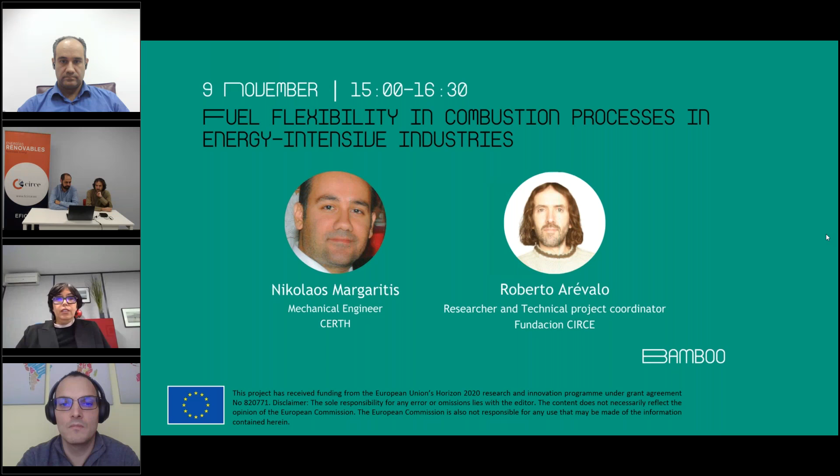I think Jorge is going to talk first. Thank you, thank you Selena for the introduction. So here we are, first of all I would like to say thank you to all the people that already joined the webinar.

This is the second of the series of webinars that we are using to learn about the different technologies that we are investigating during the Bamboo project.

So, can you pass to them?

Bamboo is the acronym for Boosting New Approach for Flexibility and Management by Optimization of Gas and Waste Use. This project, as Selena said, is financed by the European Commission under the call for H2020, and is part of the SPIRE program.

It's an innovation action funded with almost 11 million euros from the EU, and the duration of the project is 54 months, so we will end the project by February 2023.

Circe performs the role of coordinator, and we have 19 partners that include some research centers and some private industries that work mostly in the demos that we are performing at different sites.

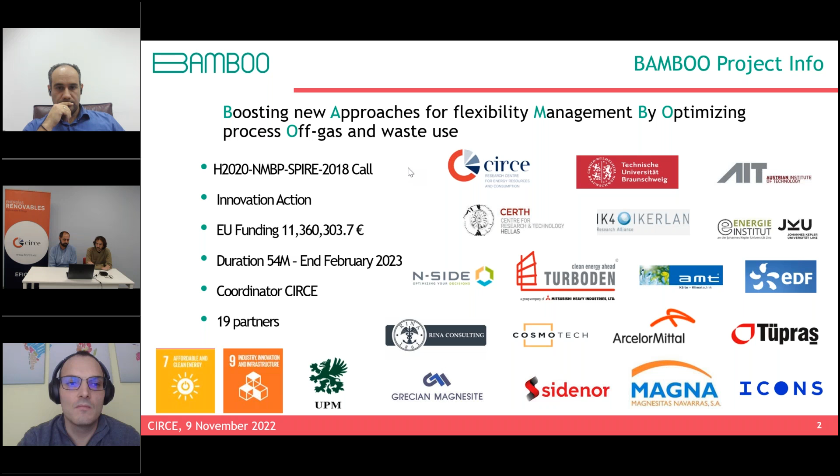So Jorge, if you want to go into more technical detail. Okay, good afternoon everybody, thank you for connecting today. I am Jorge Arroyo, I'm going to explain the technical part of the Bamboo project.

As you know, the energy transition towards a secure, competitive, and decarbonized energy system is a challenge for the intensive industries of the European Union. In this context, Bamboo is developing new technologies which will help reduce energy costs between 15 to 20%, reduce greenhouse gas emissions up to 23%, and improve energy efficiency 17 to 20%.

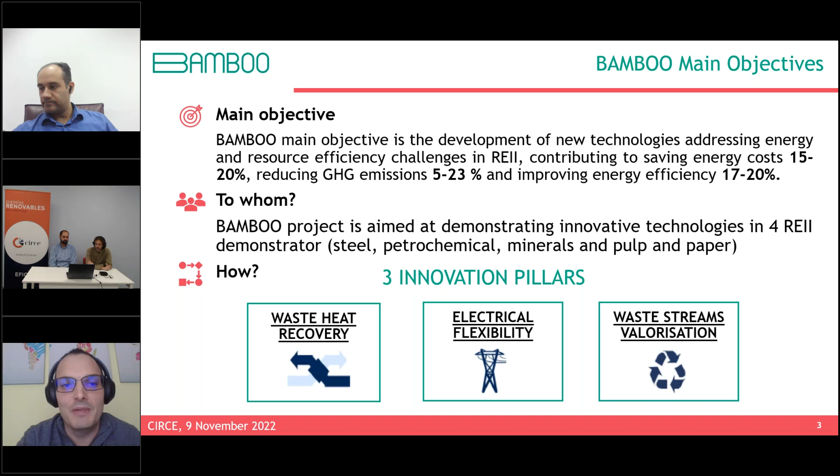Bamboo project is aimed at demonstrating innovative technologies that can contribute to European industry decarbonization, including the three main pillars of the project: waste heat recovery, electrical flexibility, and waste stream valorization. We are working on the demonstration of these technologies at an industrial level in the steel, petrochemical, paper, and mineral sectors.

In Bamboo, we demonstrate technologies for waste heat recovery. This is to valorize the energy content of some waste streams due to their temperature and their usage in other parts of the process. The project aims at demonstrating two technologies: high temperature heat pumps and organic Rankine cycles.

In the case of high temperature heat pumps, they are active heat recovery systems that allow the upgrading of low or medium waste heat to higher temperatures. We are working on a particular application for the case of ArcelorMittal in the steel sector to produce steam which can be used in parts of the process.

This application is expected to have a direct impact on the fossil fuel consumption of the plants. Part of the fuel used to generate this steam will be replaced by the energy generated by the heat pump. The second technology contributes to the electricity consumption reduction of the Tüpraş refinery from the petrochemical sector.

In this case, the organic Rankine cycle technology is studied to recover medium-grade waste heat generated in a crude distillation unit. With the ORC, this energy is converted to electricity which can be used directly in the plant, reducing consumption from the grid.

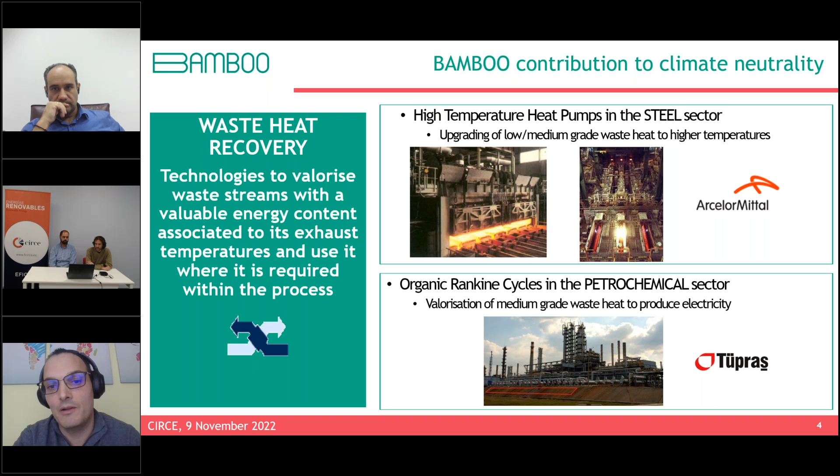The second pillar, which is electrical flexibility, includes technologies and operational strategies that will make it possible for industries to take advantage of lower electricity prices, providing grid services, as well as enabling the potential integration of renewable energies.

In this context, Bamboo is working on applying the concept of electrical flexibility to the pulp and paper sector, where different strategies and technologies are being implemented to allow the operation of a paper plant as a battery in a regional power grid. This means that during summer, where a high share of photovoltaic generation is expected, the plant will reduce or shut down its own generation system to consume more power from the grid.

While in winter mode, with very low renewable generation, the UPM plant generators can be used not only for internal use, but also to supply energy to the local power grid.

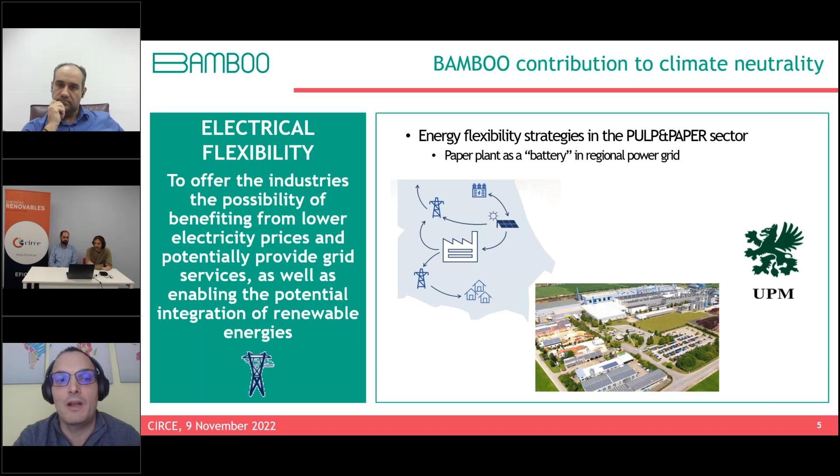The third pillar is waste stream valorization, which includes technologies and processes that allow the upgrading of different waste streams with valuable calorific value, generated inside or outside the plant, that can be used as fuels in other processes. This is the main topic for today's webinar, and Bamboo aims at demonstrating different technologies for the steel and mineral sectors. The concept for the steel sector is to increase the valorization of off-process gas as fuel, to increase the efficiency of the plant and reduce the consumption of fossil fuels.

In this sense, in Bamboo we are applying two technologies that contribute to the valorization of this process gas. On one hand, CFD simulation that allows us to analyze the behavior of combustion when these often low calorific value gases are burned, and a novel flame monitoring system which allows monitoring of the combustion to improve efficiency and decrease pollutant emissions.

For the mineral sector, the replacement of coke by biomass is demonstrated, with a direct impact on fossil fuel consumption, helping the decarbonization of the sector. Again, we are using CFD simulations to demonstrate how this biomass can contribute to the reduction of fossil fuel consumption and pollutant emissions. We have also developed low NOx burners, which can increase the share of renewable energy, contributing to decreasing the consumption of fossil fuel.

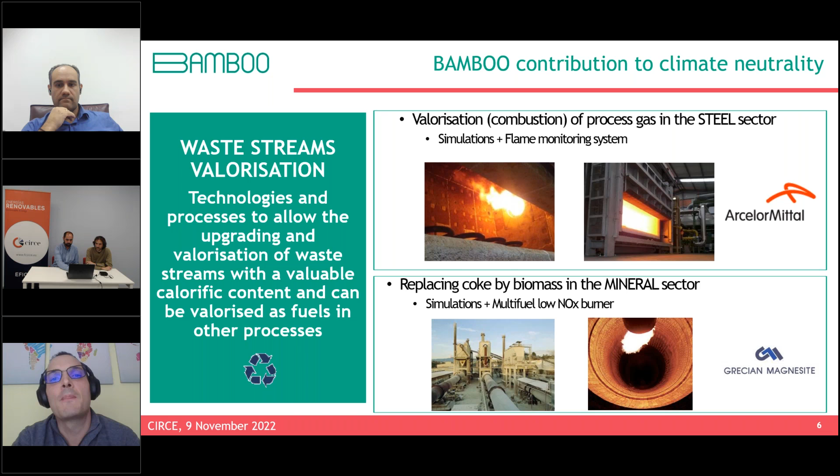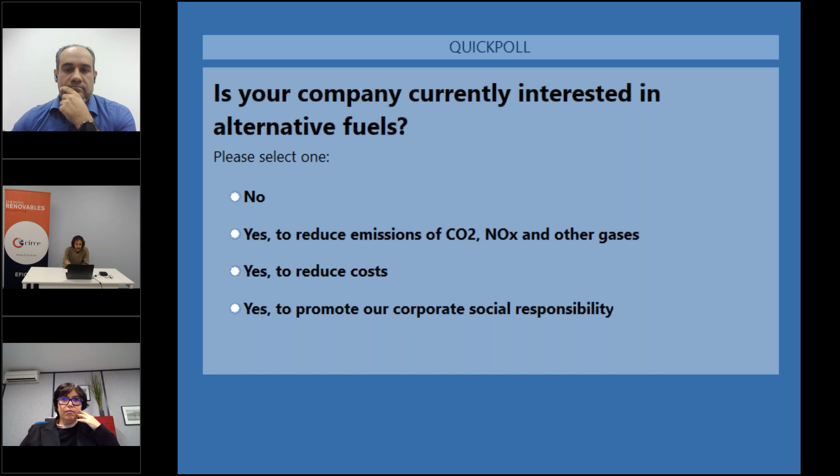Okay, so a small percentage, just 4%, is not currently interested in alternative fuels. The highest majority of you are interested in order to reduce emissions. That's very interesting, and there are a few who are more interested in reducing costs and promoting CSR.

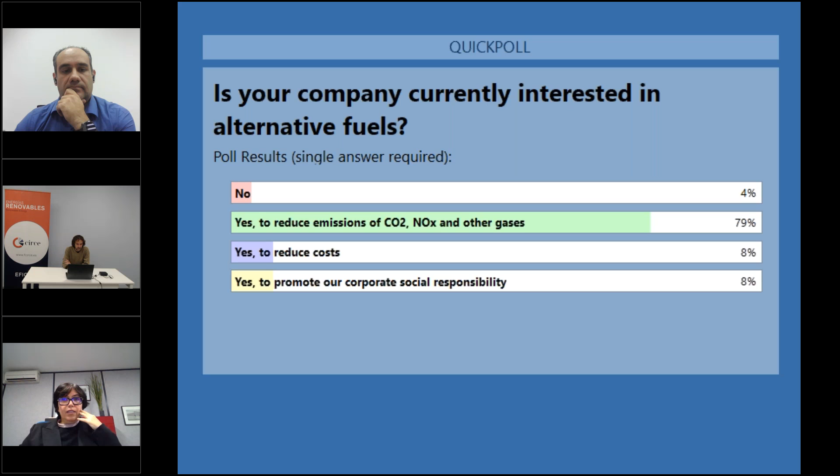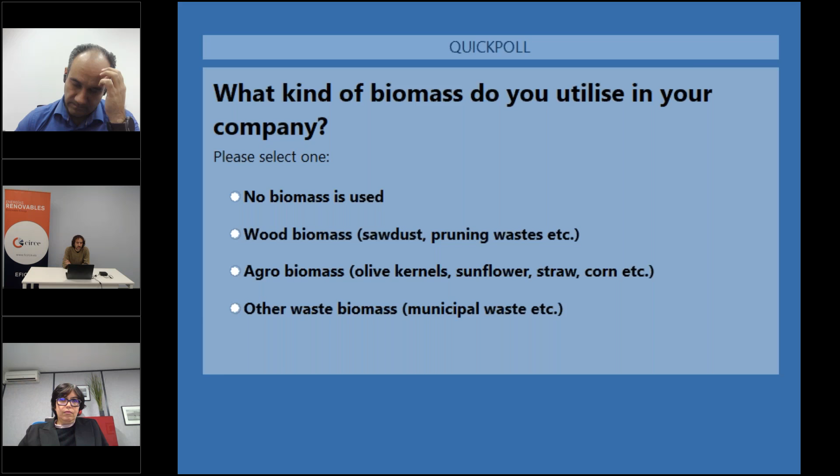Second poll: what kind of biomass do you utilize in your company? You might not be using biomass at all, wood biomass, agro biomass, or other waste biomass. Let us know. Okay, most of you don't use biomass, 39%. 30% use wood biomass, and the rest use agro biomass or other waste biomass.

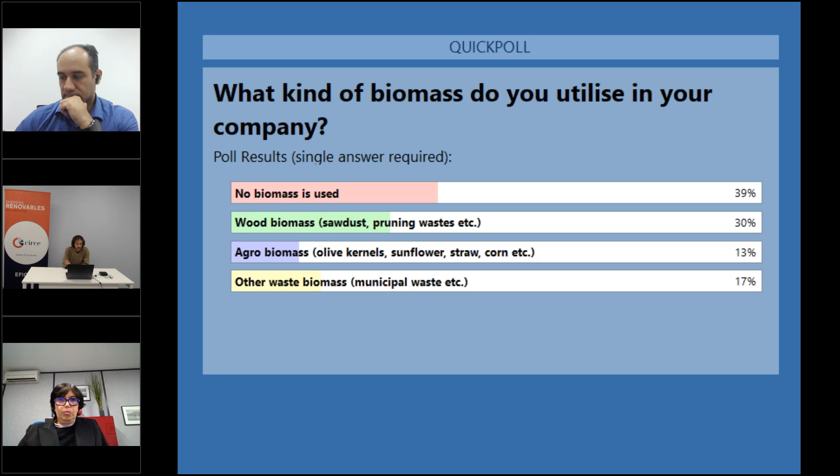Last poll, and this one is a bit tricky. According to you, do low NOx burners reduce the production of NOx by controlling fuel and air mix, reduce emissions by 100%, present high efficiency at very high temperatures, or are they similar to conventional burners but more expensive? What do you think? There is a right answer to this.

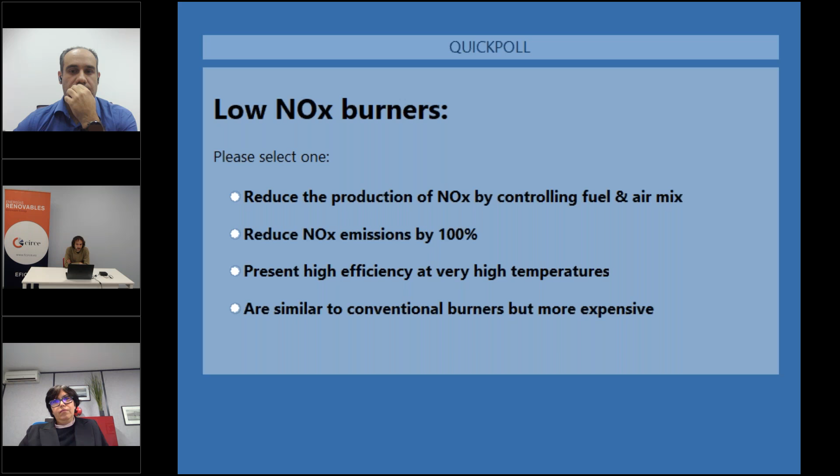So most of you selected the first answer, 14% the third one, and then the other ones received fewer votes. I don't know if the panelists want to give the right answer now, or do we wait for the panel to reveal it? What do you think?

I think the panel gave the right answer, by the 75%. The first answer is the right one. Low NOx burners reduce the production of NOx by controlling fuel and air mix.

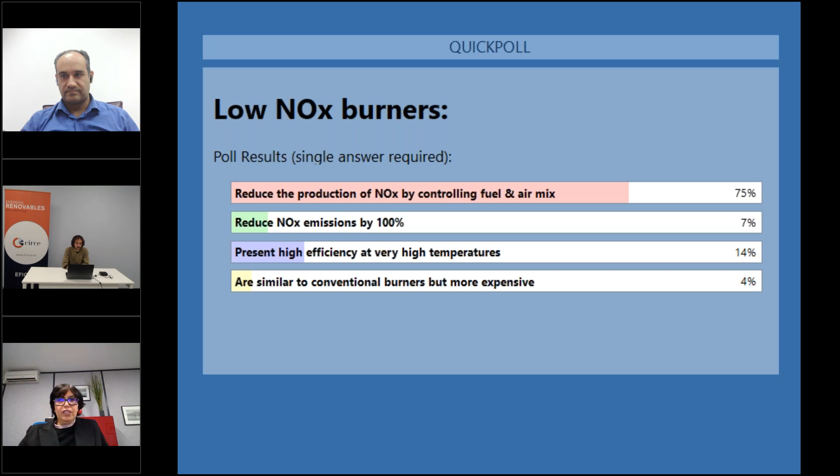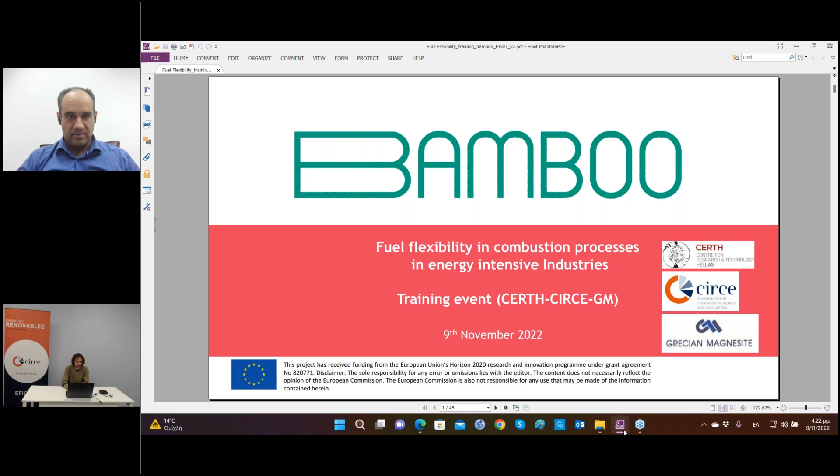Thank you, Selene, for the introduction and the comments in the poll section. Just a brief comment about the poll: I think most of the companies here are interested in reducing CO2, NOx, and other pollutants. This is a primary scope, but we can also say that this reduction of gases is related very closely to the cost of production of the company.

Biomass is not used by most of the companies here, but there is interest - 30% use wood biomass. It's the most commonly used biomass. 13% said that agrobiomass is used, and that's normal because agrobiomass has some difficulties when trying to apply it in the production process.

Regarding the low NOx burner, I think the audience chose the right answer. This is also normal because most of you are technicians here in today's webinar. So, I'm Nikos Margaritis.

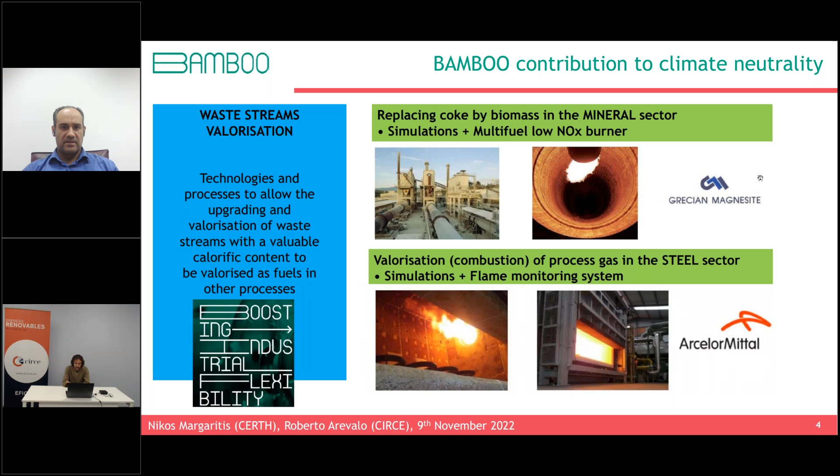Regarding energy-intensive industries, what are the challenges? When we say energy-intensive industries, we usually refer to cement, lime, magnesia, sintered lime, ceramics, glass, steel, and other similar industries. Usually in these industries we have high temperature processes, up to 1,100, up to 1,800 or higher, and of course we have CO2 emissions that derive either from the combustion of fuels or from the decomposition of carbonate raw materials, which is an inevitable process we can do nothing to avoid.

Also the use of carbon as a reducing agent, and fuel combustion, as known, entails high thermal losses and may also lead to other pollutants like SOx, NOx, CO, and other pollutants.

We're talking usually about continuous production cycles that require steady energy supply. This is very important and also a challenge for these industries. Energy efficiency and productivity can be increased by thermal insulation, energy recovery to use the heat, heat pumps, organic Rankine cycles, or automation and digitization, which can also contribute to energy efficiency and productivity.

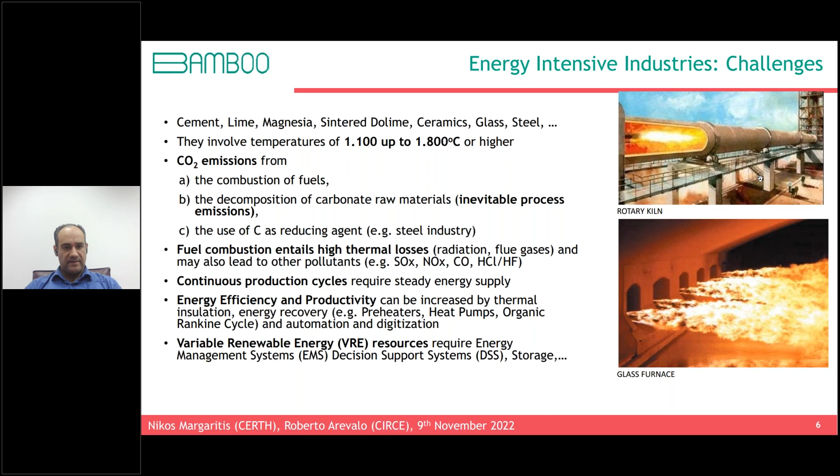And also use of variable renewable sources, a good energy management system, and a DSS tool - all these things can help increase the energy efficiency of energy-intensive industries.

Regarding decarbonization, the top priority of EU member states is to gradually move to a low carbon economy, meaning 80% reduction in emissions by 2050 compared to 1990 levels. CO2 emissions in the case of the magnesia industry derive from fossil solid fuels related to their production process. This type of emission must be tackled so these industries do not face issues due to continuous increases in CO2 prices. They have some CO2 free allowances until 2030 according to EU regulation 2019, but after 2030 they're going to face increased CO2 prices, so the problem of cost reduction will always be important.

So here we can see that the CO2 price in March 2021 was below 40 euros per ton, and we see that gradually it increases. It reaches in January, February 2022 almost 90 euros per ton, and now, on the 4th of November, it was below 80 euros per ton.

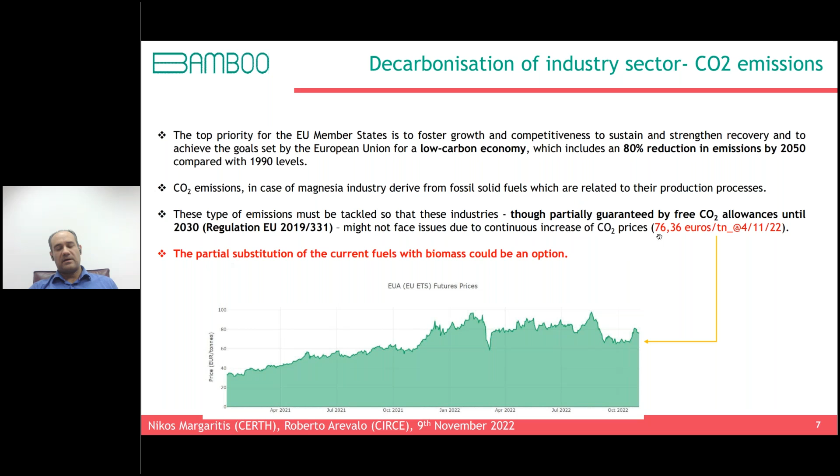One of the drivers for biomass and coal co-firing is the increased environmental performance at a modest cost. What we earn when we replace biomass during co-firing is a reduction of SOx emissions. Also, biomass helps to reduce mainly NOx emissions, and biomass can also reduce flame temperatures, which leads to lower levels of thermal NOx. Also a reduction can be the case if high moisture biomass is used.

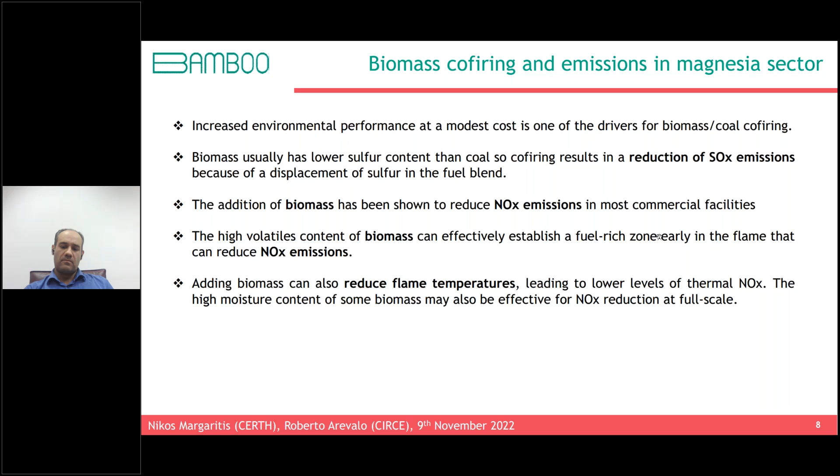Regarding the use case of Grecian Magnesite in the Bamboo project, we had to support the Greek demo, located in Chalkidiki, north part of Greece. Here we see the calcination plant in Yerakini mine, the installation, the premises of the company. Here you can see the rotary kilns of the company, where they produce natural magnesia from magnesite.

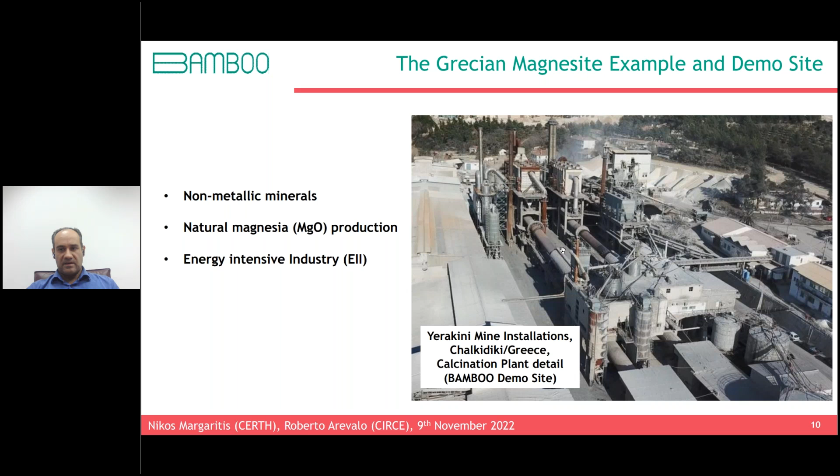Regarding the production flow sheet, first of all they do mining, extraction of raw material. Then there is a stage of pre-beneficiation, separation of magnesite from the waste rock. Then there is beneficiation, the qualitative separation of magnesite grades. Then we have calcination in the rotary kilns I showed you before. What does calcination mean? Magnesite is transformed into magnesia. The product for GM, the final product, is magnesia.

Magnesia can be calcined magnesia, which is produced at temperatures between 900 and 1100 degrees in the kiln, or another product is dead-burned magnesia, called DBM. We have CCM, the calcined magnesia, and the DBM product, which is more challenging in its production because it's produced at temperatures well above 1800 Celsius.

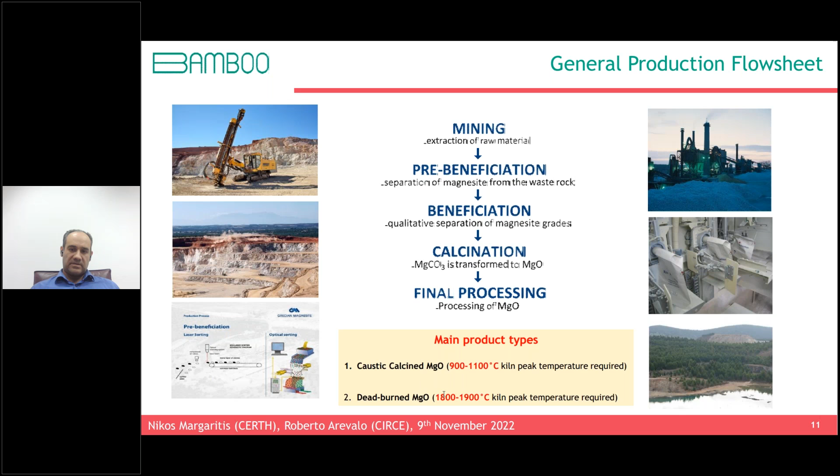So what are GM's targets and challenges? GM has had some targets, and this was the reason to participate in the Bamboo project. The main target was to increase the energy efficiency of the calcination department and globally at the Yerakini plant, to reduce the dependence on fossil fuel - their main fuel is coke, pet coke - and so they want to gradually replace coke with biomass in order to reduce CO2 and NOx emissions, to allow flexible energy consumption according to market prices, and also to check some good practices regarding waste heat recovery in their process.

For example, ORC or heat pump application, or any other technology studied in the Bamboo project. What are the challenges for GM? The main limitation resides in the high temperature required to produce DBM. As I said before, DBM is a challenging product to produce because you need very, very high temperatures, and these temperatures cannot be accomplished without conventional fuel, pet coke, in the fuel mix, but you need a high fuel specific consumption.

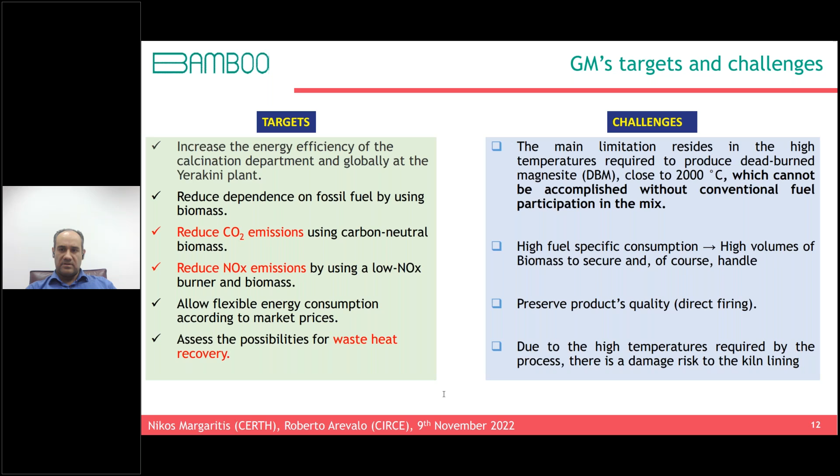What's biomass? The biodegradable fraction of products, waste, and residues from agriculture, forestry, and related industries, as well as the biodegradable fraction of industrial and municipal waste. Here, GM, in the framework of our project, wanted to utilize wood chips and sunflower husk - so wood biomass and agro biomass - in order to replace some pet coke.

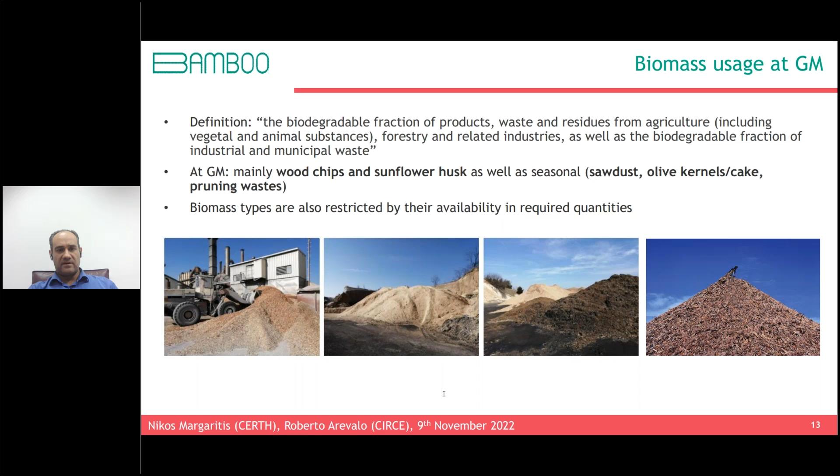The choice of biomass was restricted by availability in the near area of the demo site, because other biomass could have been used for the experimental campaign - for example, olive kernels - but in that specific time season, no quantities of this biomass were available in the market. So GM had to adapt and choose sunflower husk as the main fuel to substitute the pet coke at that time.

Here we can see the heating value of biomass related to pet coke. Pet coke is the main fuel of GM, with almost 8,000 kilocalories per kilo as its heating value. The other biomass fuels—olive kernel, sunflower husk, sawdust, wood chips—have almost half the heating value of pet coke. This means you have to double the quantity of biomass in order to produce the energy needed for the process.

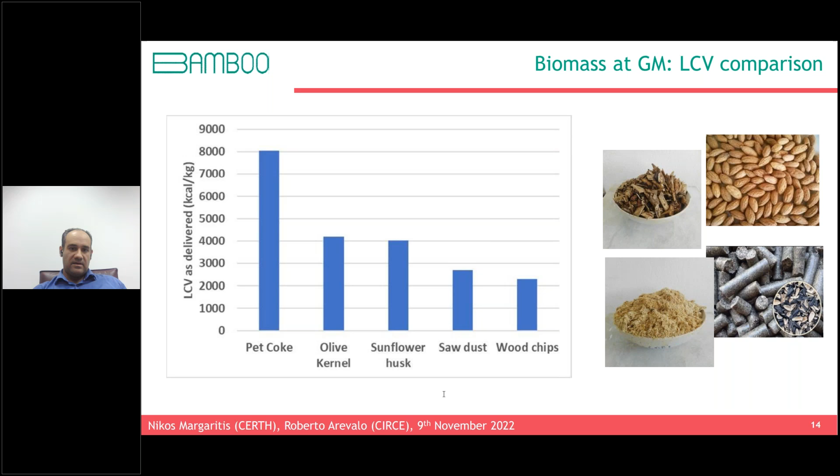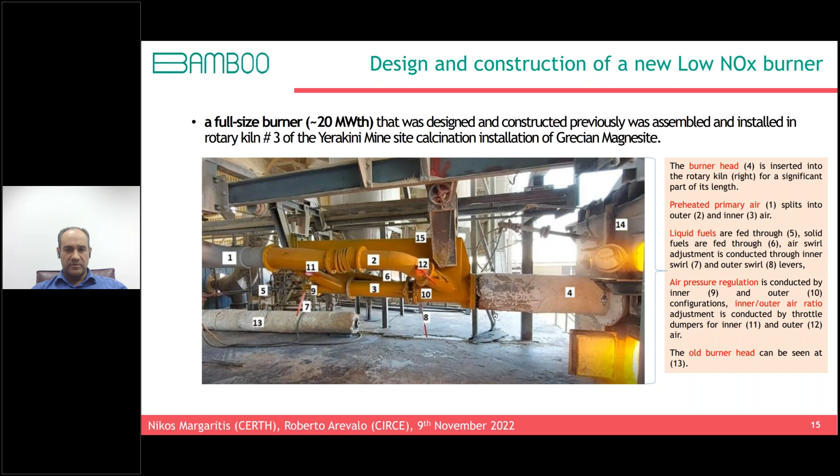So this was the Greek demo, the application of this low NOx burner, in order to check its efficiency in reduction of NOx emissions during the production of magnesia products.

So the initial burner test was successful, and the first trials were very good.

We have a question. What is the CO2 reduction in flue gas combustion using biomass instead of coke?

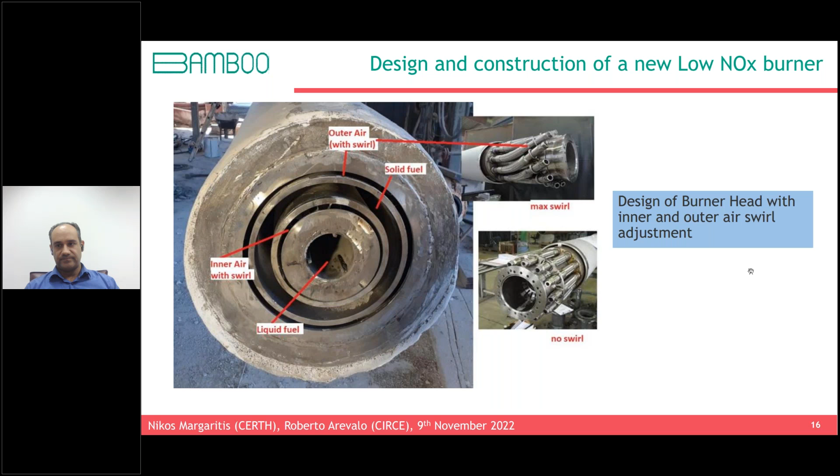Another question: can coke still be used in the new burner in case of no available biomass?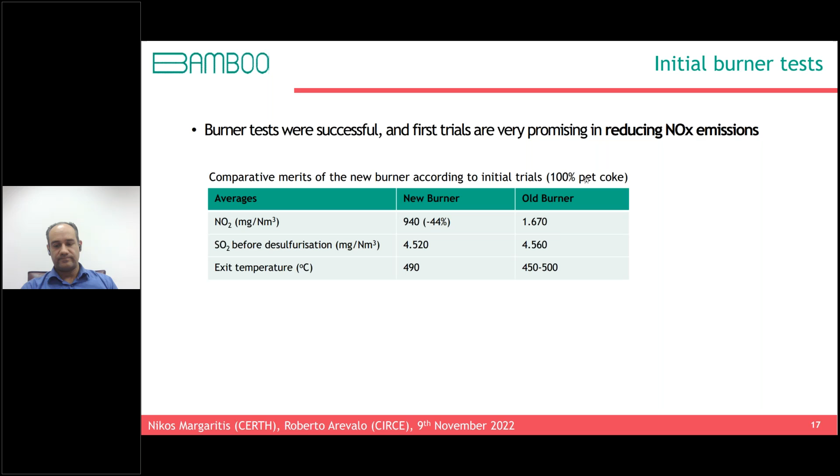Yes, of course, you can use it. You can use the LNB with 100% pet coke—these results refer to 100% pet coke. There's no problem. These burners are designed this way to handle also biomass except for pet coke, but pet coke is the easy way.

Here you can see the fuel mix preparation. Here we have the biomass, sunflower husk pellets, and the twin rotor in order to achieve the proper granularity of the biomass. In another silo we have the pet coke. Pet coke and biomass are entered into this feeding silo, where the mixed fuel is prepared.

Then we have a mixer here, a weighing system, and the mixed fuel. This is the image of the mixed fuel, pet coke and biomass—you can see the color of pet coke is more intense. So this fuel goes to the low NOx burner we mentioned before, at the entrance of rotary kiln 3.

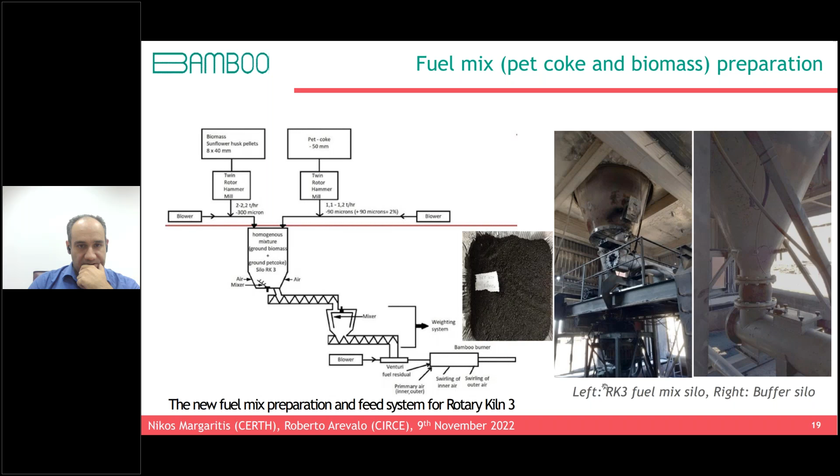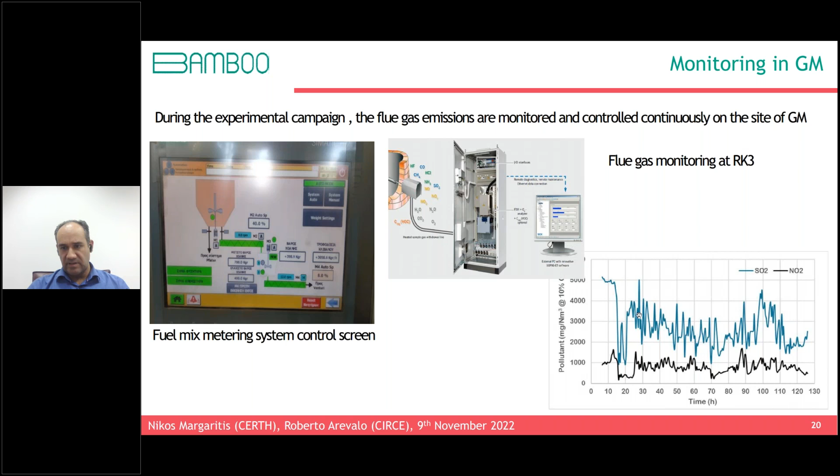During the experimental campaign, we had flue gas emissions monitoring in order to check the SO2 and NOx emissions, and also from this card you can see the control of the fuel mix, biomass and petcoke, anytime in the rotary kiln. Here we can see the SO2 and NO2.

This table summarizes the main results of the experimental campaigns conducted in February 2022 at GM with the support of us, the Research Institute. These concern various DBM grades and petcoke substitution rates of 50%, which was the maximum substitution rate achieved during these experimental campaigns.

You can see also the comparison with 3 cases. The first case was only petcoke - this is the business as usual case, only petcoke in the rotary kiln. You have this SO2, this NO2, and around 1,500 Celsius.

When we used sunflower husk pellets with petcoke, you can see we have petcoke at 1,000 kilos per hour flow rate, and we have also sunflower husk in the fuel mixture. We have a 50% contribution of petcoke energetically with biomass.

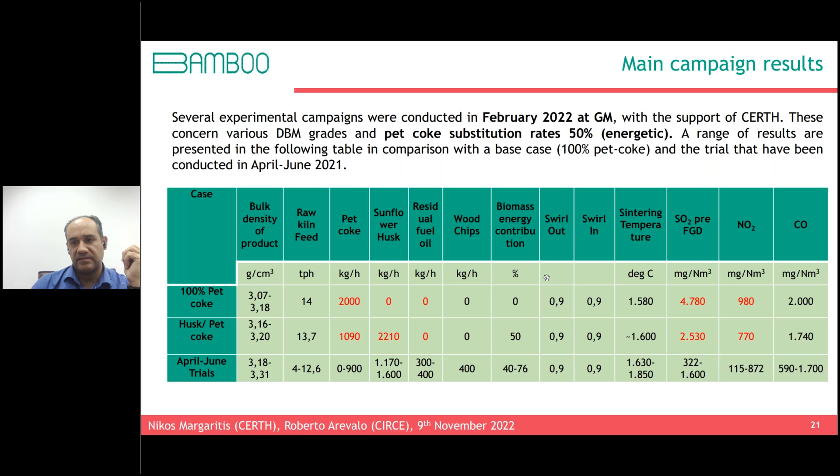We have in Ptolemaida in Greece a laboratory dedicated to chemical characterization of solid fuels. We have all the necessary equipment to analyze, according to ISO 17025, biomass fuels, solid fuels, SRF, municipal waste, and any other solid fuel that can be used in production can be physically and chemically characterized by us here in Ptolemaida in our lab.

So here we see the main results of petcoke analysis, sunflower husk analysis, and mixed fuel analysis in terms of moisture, ash, volatiles, carbon, hydrogen, nitrogen, sulfur, chlorine in the fuel, and also energy content of the fuel.

So we see here the high energy content of the petcoke, around 8,000, and half of this, around 5,000, is the heating value of sunflower. So the mixed fuel that we receive, with the mixture of these fuels, has a high heating value of around 6,700 calories per gram energy content.

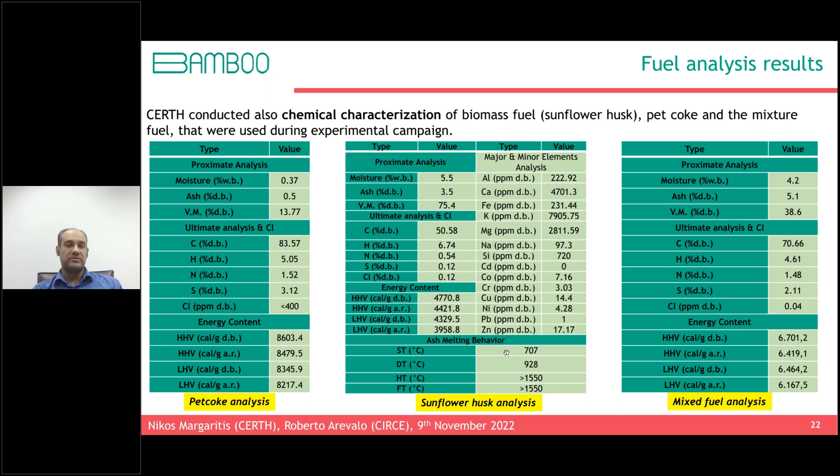SO2 emissions are reduced because, as you can see here, biomass usually has very low sulfur content, 0.12, in contrast to petcoke that has high sulfur content, almost 3.12%. So the final fuel has around 2% sulfur in the mixture, so it's smaller than 3. This smaller sulfur concentration in the final fuel means that you have reduced emissions in your flue gas in the end.

The planning of GM is to maximize the co-firing ratio to above 50%, taking into account the existing technical limitations and without compromising product quality, as I said in the beginning.

GM has 3 rotary kilns. This was applied in rotary kiln 3, so this can be replicated also to the other 2 rotary kilns of GM.

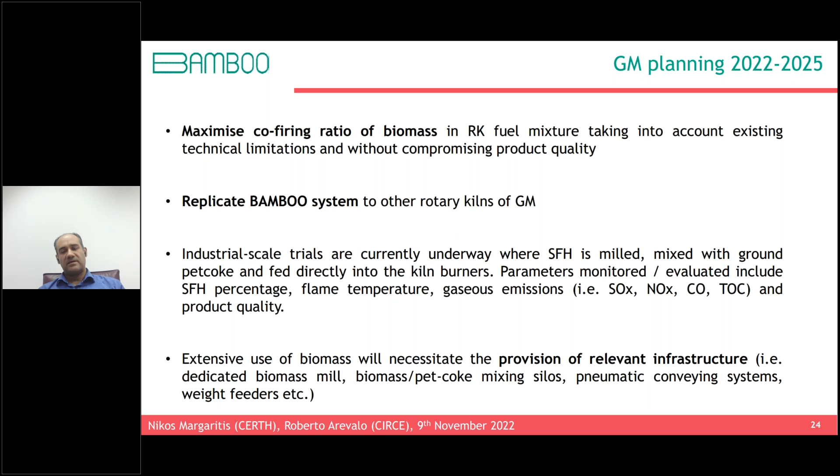But important is that the extensive use of biomass means that you have to invest in relevant infrastructure, dedicated biomass mills, biomass petcoke mixing silos, in order to handle the biomass petcoke mixture better. So an investment has to go there in order to handle the new fuel that you are going to use in your production process.

Now I give the floor to Roberto in order to analyze the use case of ArcelorMittal, and I will also tell some things in the end for the flexibility tools. Before giving the floor to Roberto, I have another question.

What is the humidity of biomass and how can it affect the heat consumption, since the water can absorb heat from the combustion? The biomass usually has high moisture, 4%. This means that you have to use more biomass in order to achieve the right energy you want to produce your DBM or CCM product. And the high moisture is good because you reduce the flame temperature, and when you reduce the flame temperature, you reduce the NOx emissions. So it's not bad to have this moisture in the biomass.

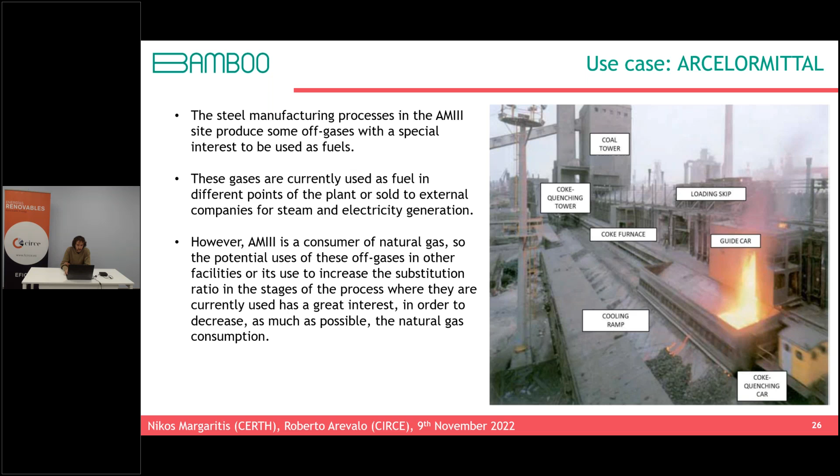Regarding fuel substitution or alternate fuels. ArcelorMittal hardly needs a presentation, worldwide steel producer. We've been working with a factory in the north of Spain, and here the focus is on using process gas as a fuel to substitute part of the natural gas that they use. The process gas we are interested in is BFG, blast furnace gas, which is produced in one of the early processes of the plant.

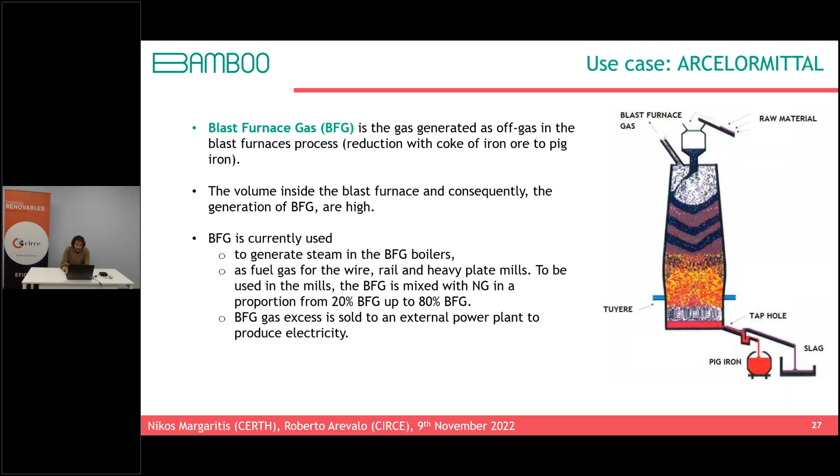This means that when we are using BFG to replace part of the natural gas, we have to use much higher flows. Although BFG is highly available in the plant and much of the piping is already in place, we have to be careful because these high flows can put stresses and other problems on the piping.

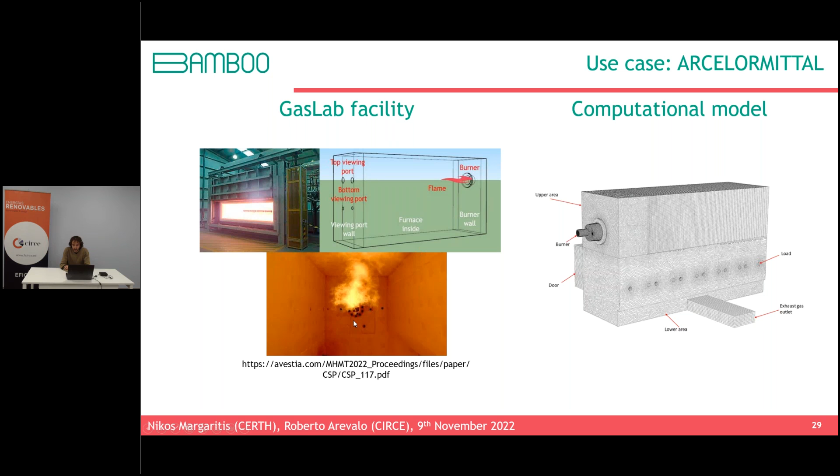The activities that we have done in Arcelor, together with Arcelor, is a twofold study. We carried out an experimental study in a gas laboratory facility, which is a small chamber with a burner. On the left you can see pipes that simulate the load of the burner. On the right part of the screen, you can see the computational model that we used to perform simulations of this facility and of the combustion of mixes of gases.

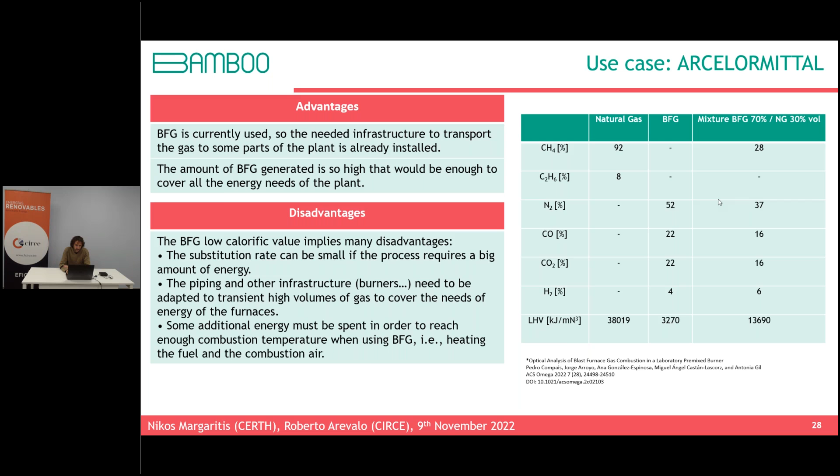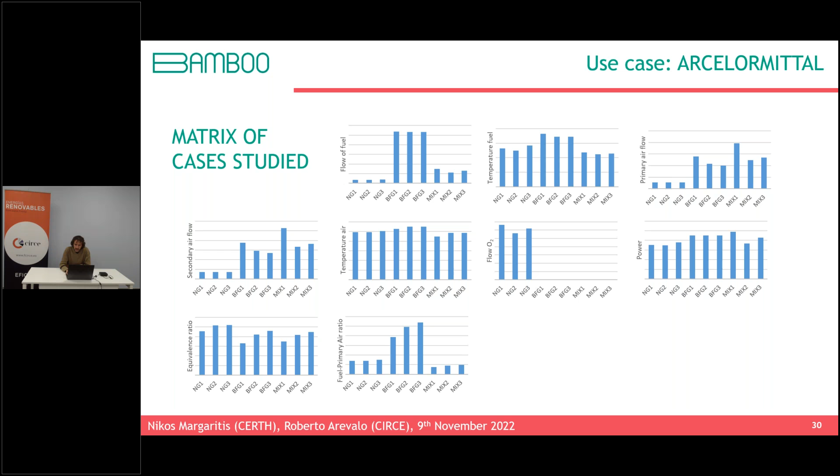There is a question: does the BFG need any treatment to be used as fuel? No, as far as I know, it is used without pretreatment. Yes, it is used as such.

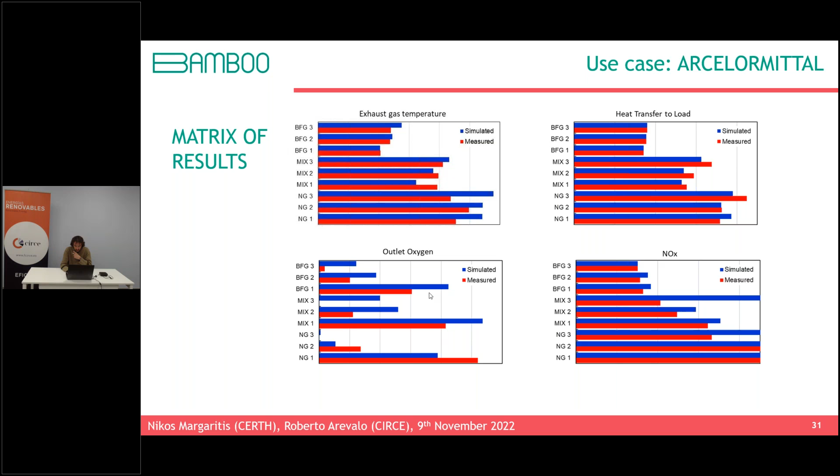So my part is shorter. I'll come right now to the conclusions. In general, comparing the experiments and simulations carried out with BFG, meaning only BFG as fuel, and the mix of BFG and natural gas, we can see that when we use only BFG, we need a much higher flow of gas because of the lower heating value.

This is pertaining to the question: BFG had to be preheated by 10 degrees Celsius, so it's not a huge preheating, just a small one. Regarding thermal load, heat transfer to the load, with BFG only 50% of the thermal load was achieved, but using a mix we reach 80%, and for the rest 20% can be tuned, of course. This could be done, for example, with simulation to come up with the right value of the mix that would give us 100% load.

The temperature of the gas in the chamber with BFG was 200 to 300 degrees lower. This is to be expected also. Instead, when we use a mix, the temperature of the gas in the chamber is only very slightly below the required value. NOx emissions are significantly reduced in both cases. Of course, with BFG they are more reduced because the temperatures are lower, but the main point is that when we use a mix of BFG and natural gas, they are also reduced.

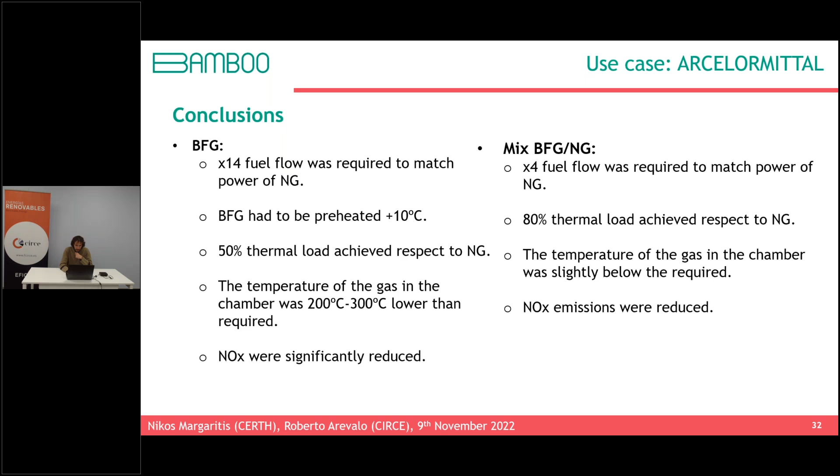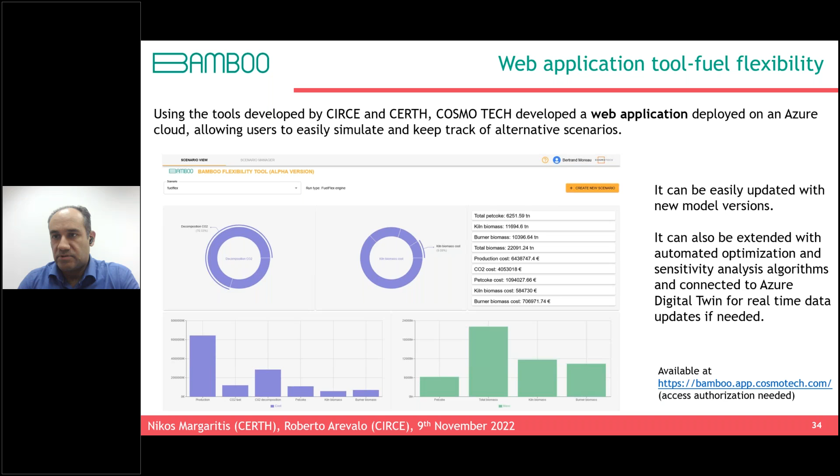Okay, now is the part of application of flexibility tools. This slide is from Nikos. Okay, you can go ahead. If you need me to pass the presentation, you tell me. Okay, I will read from you.

Here you can see a screen of this web application. Okay, Roberto, please change the slide. Okay, here it's yours. Yes, thank you. So well, as Nikos just said,

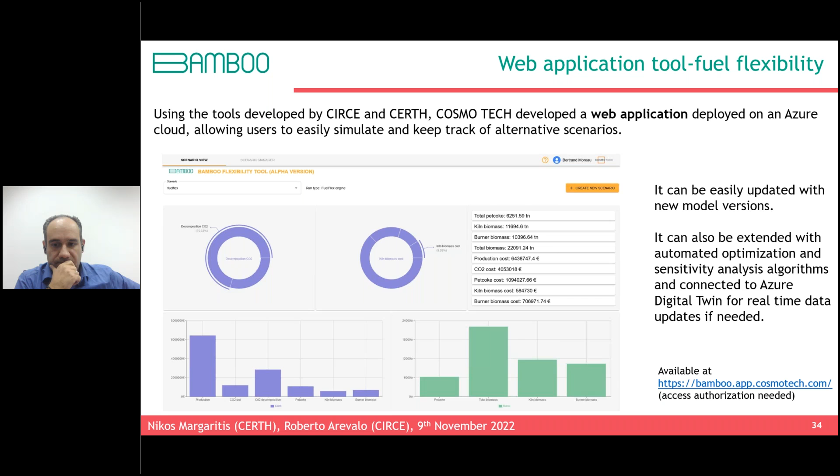this tool has two parts: one related to CO2 calculations, and another related to a digital twin of the rotary kiln used in GM, one of them. Here in Circe, we have carried out simulations of this rotary kiln to produce a digital twin that is going to be used in this tool to predict the behavior of the combustion inside the kiln when we change the mix of fuel, when we are using a mix of coke and a certain type of biomass.

So the way to produce this digital twin is to first produce a CFD simulation of the rotary kiln. Here you can see just a few features of the simulation: the geometrical model that we have set up for the rotary kiln, and the physics that we introduce. We simulate the combustion of the coke or the biomass, we simulate also the gaseous chemical reactions, and we take into account mixing by turbulence, heat transfer by radiation and convection.

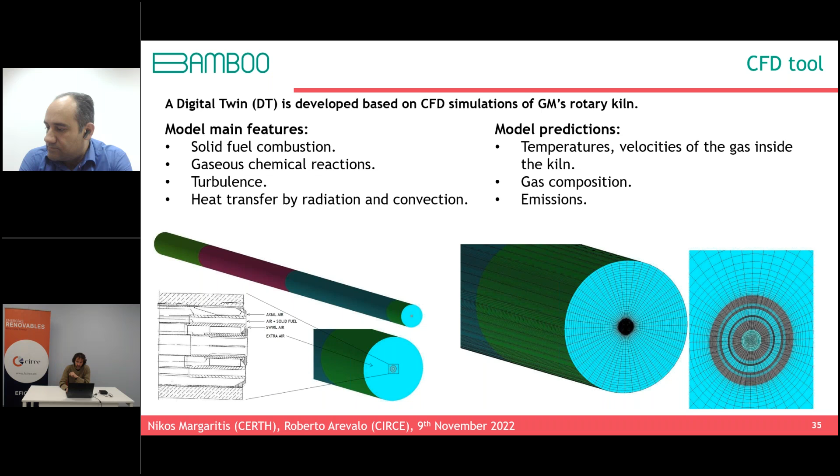The model predictions are, in a physical simulation of this kind, you can really have all the fields that you need: temperatures, velocities, turbulence, gas composition, pressures, etc. For this project, we chose just a few of them: the temperatures and velocities along the kiln, and also the gas composition and temperatures at the exit of the kiln.

This is an example of the results of CFD simulations. On the left, you can see a plot along a cut along the rotary kiln. You can see the base case, using pet coke and the old burner with only one source of swirl, versus other cases using two sources of swirl. On the right, you can see simulations comparing the base case using only coke with several substitutions of biomass. The numbers 30, 40, 50 stand for 30%, 40%, 50% energy substitution supplied by biomass, and here we tested two types of biomass.

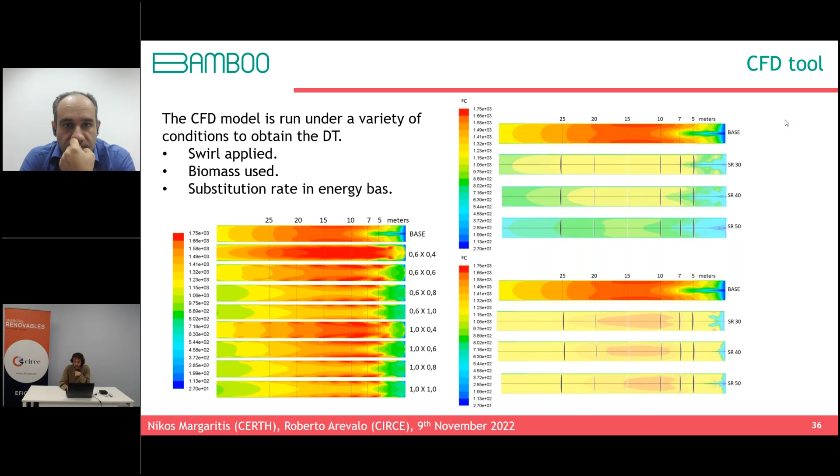So we made a campaign of simulations, many simulations, simulating many scenarios. After we have all that data, we produce a digital twin, which is a mathematical representation, much simpler than the whole simulation. The digital twin allows us to obtain results in real time, because it uses the results of all the previous simulations.

This is a snapshot of the same tool, but this would be the digital twin application part. Here you can see two plots, I suppose of temperature and velocity. On the right, I extracted two plots to see them better: the temperature along the kiln for several scenarios, and the velocity along the kiln also for several scenarios.

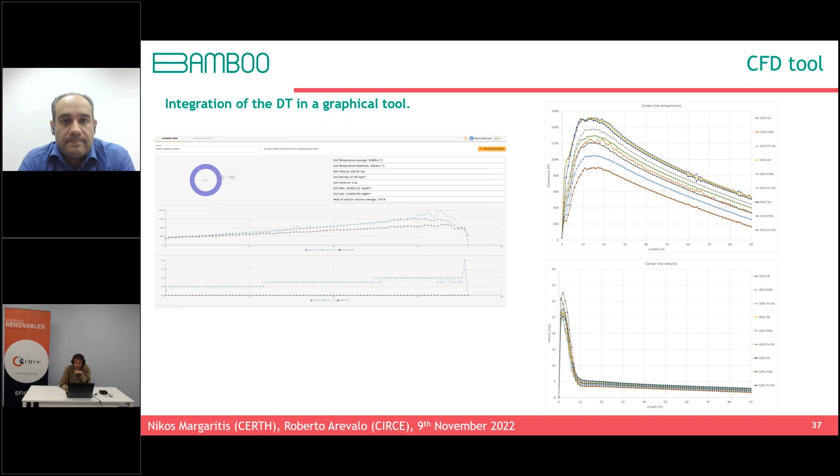This slide is also an answer to an audience question regarding CO2 emissions reduction from pet coke substitution with biomass. We developed a calculation tool to calculate how much the reduction in CO2 emissions is according to the biomass substitution, and what this means for production cost due to CO2 prices. The amount of CO2 is reduced to 61,000 tons when 70% substitution rate is achieved with biomass.

As you can see here in the table, we did simulations with 0, 30, 50, and 70% substitution of biomass. As I said earlier in my presentation, we can do nothing until now about the CO2 emitted due to decomposition of magnesite to magnesia - this is not something we can avoid. That's why you see a stable number for CO2 emissions regarding decomposition.

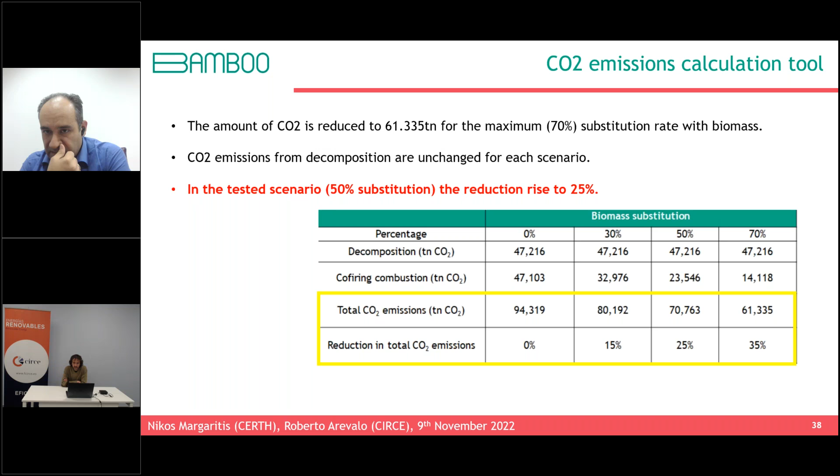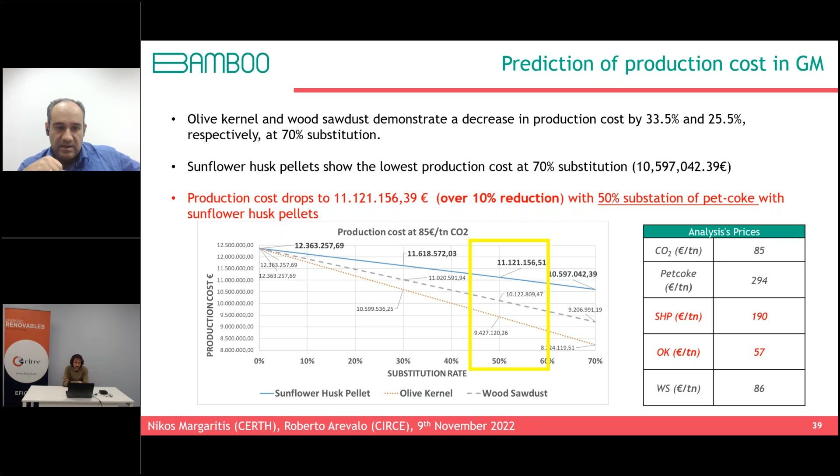And in the next slide, now we have two slides, one on lessons learned from GM and one from ArcelorMittal.

So the first step regarding waste streams valorization is to measure which are these waste streams. Regarding biomass use, it's important to check the availability within the area in order to reduce the cost of the value chain. It is not worth buying biomass 1,000 kilometers away from your plant. This is not cost efficient. So biomass use will be efficient for the company if it has some biomass within a perimeter of 50 to 100 kilometers around the plant factory, because the value chain and the cost value chain are very important in these activities.

Regarding the low NOx burner, it is able to adjust to different temperatures of the kiln, depending on the type of the product. It's working quite well in GM.

Of course, co-fired biomass has the challenge that you have to invest and do a special feeding dosing system in order to handle the new fuel mixture in your equipment. And the production cost is something important—it has to do with CO2 allowances. So you can control the share of biomass in your production process according to the CO2 price and according to the fuel price of your main fuel, in order to earn some budget for your company for energy savings.

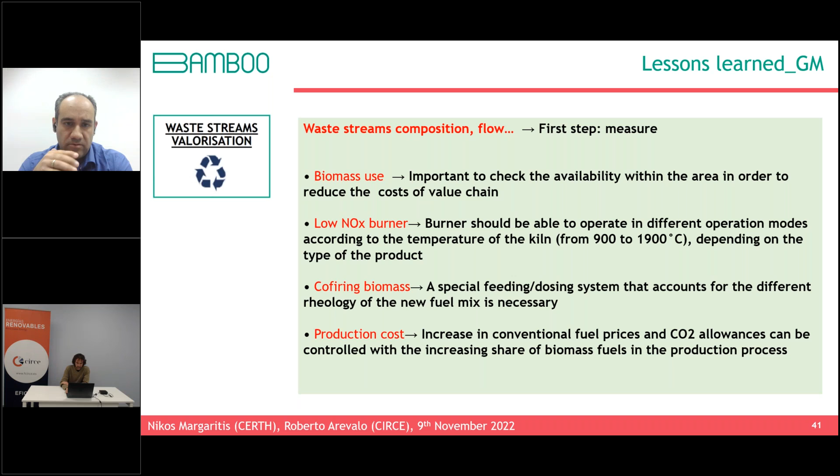Yes, as a summary of lessons learned from ArcelorMittal: we learned that we can use BFG to reduce NG consumption and in the way reduce NOx emissions. Of course, we have to tune the blend of fuel that we are going to use. We need to characterize properly the gas because, as I said at the beginning, the composition and, for example, the low heating value and other properties of the gas can depend on how it is produced exactly.

The use of enriched oxygen in natural gas combustion has been tested, and it has been observed that it reduces NOx emissions. This was only used with natural gas, so the reductions that we have seen in the results with BFG and the mix of BFG and natural gas are without the aid of this enriched oxygen process.

Well, yes, due to the properties of the BFG, it may need some conditioning, but it is very low. As we have seen, the 100% BFG was heated up 10 degrees, so it's not really a difficult conditioning.

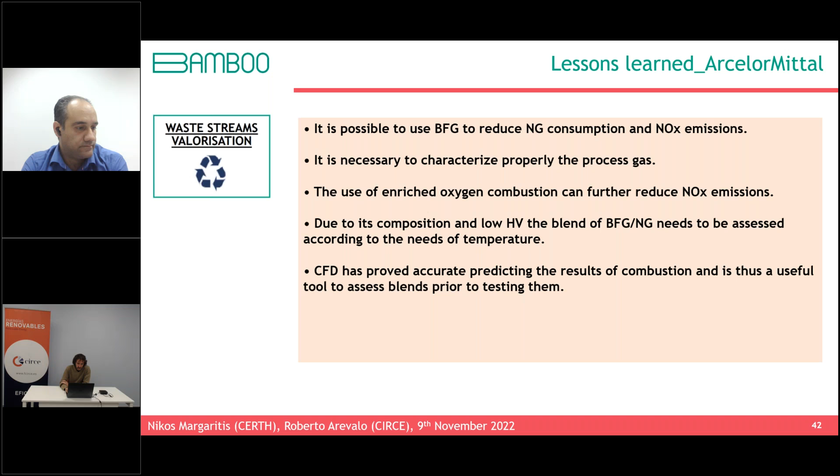And this is it. Thank you very much for your attention. And if there is any other question.